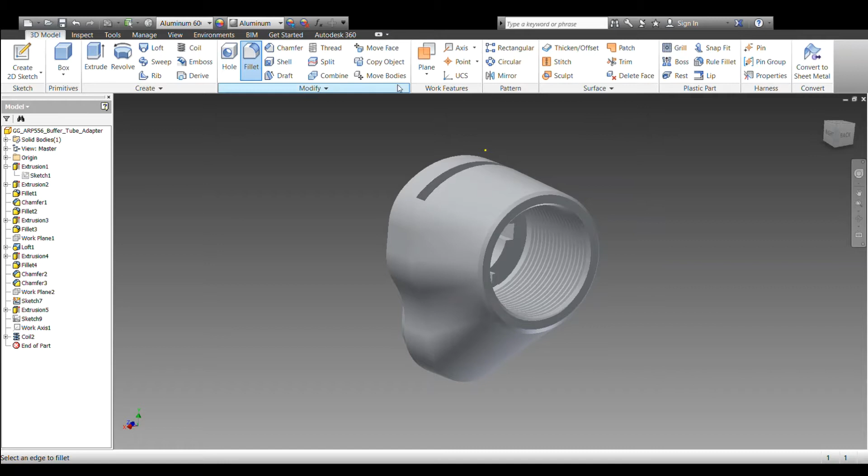I basically first started out by measuring the maximum dimensions on the X and Y, and then with a micrometer, took the measurements for the adapter plate, you know, the male part of what has to, excuse me, the female part.

Part on the ARP 556 that the adapter has to fit into. So I just took extreme dimensions to start, because that internal is really all I'm worried about there.

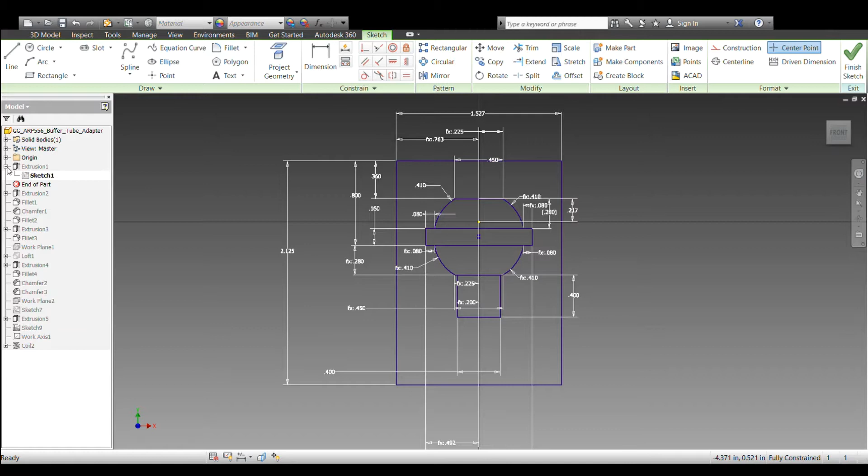So what I did here is this is just the extrusion of the male that fits into the female part. Again, just took the measurements with micrometers and added a couple fillets.

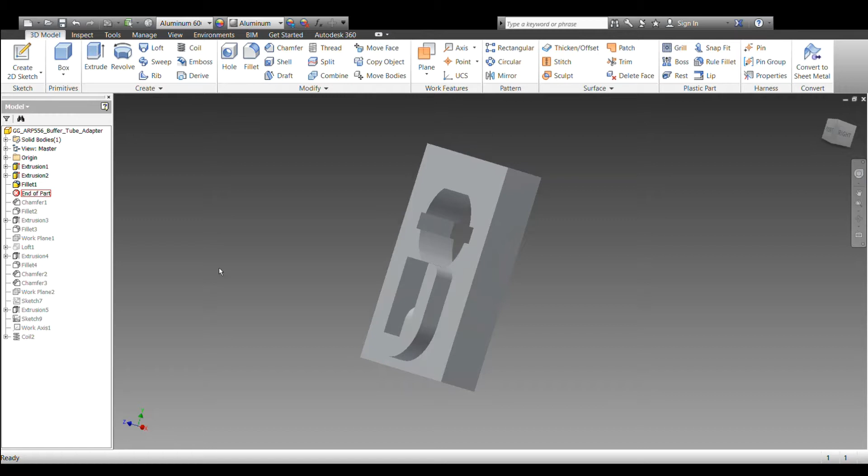There's wires that go through there, so you don't want to have any sharp edges or any kind of shear points where when you tighten everything down, it's going to get crimped in there.

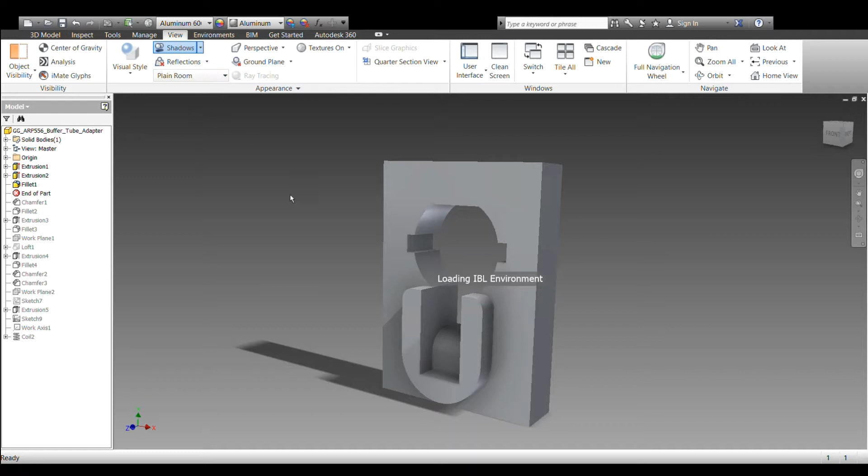So the way it is those wires are easily passed through to the buffer tube. Just a couple of chamfers again here and there, and this is all just based on the stock part that came with the gun.

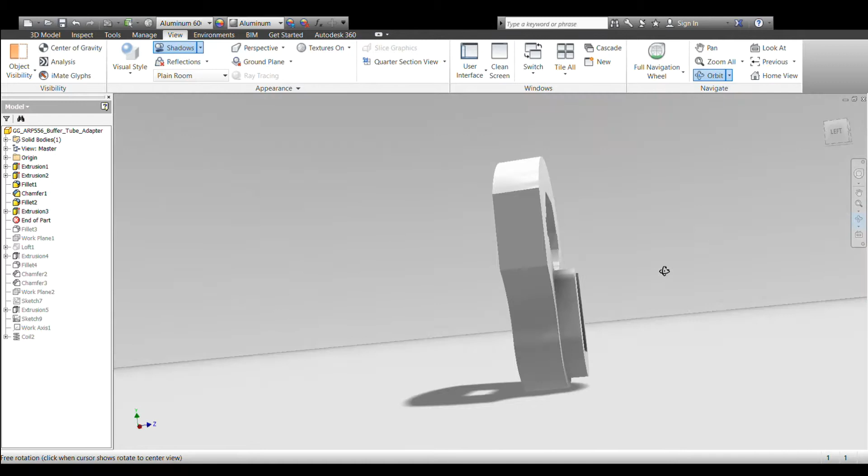I'm just kind of going through there and looking for things. They're non-critical dimensions, but I do think they serve a function in regards to molding, as well as, like we said, you don't want to have any shear points or anything that's going to crimp the wires.

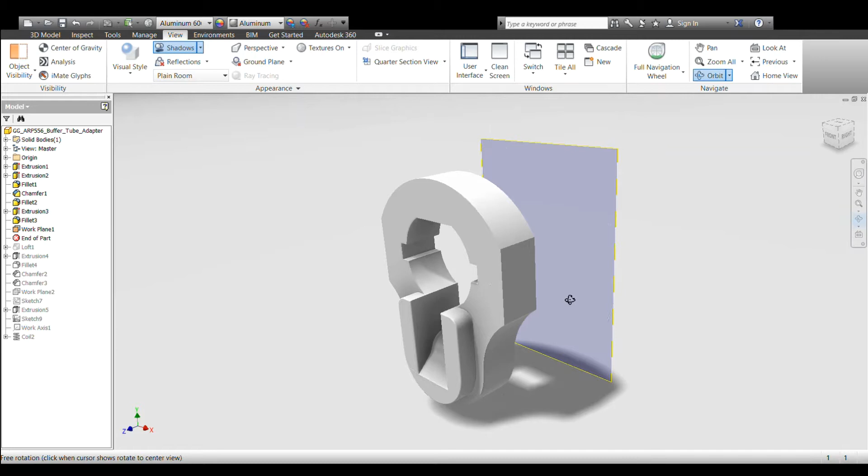So this is the loft command that I use. Basically, this is the transition step from the existing geometry to the new geometry that we want, which fortunately is just a round tube, so it's super easy. But you offset a plane, the distance that you want that tube to sit in.

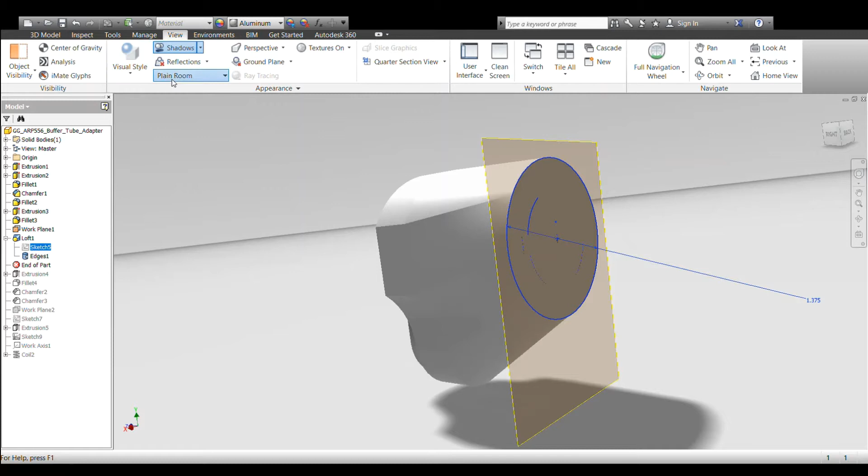Get your measurement from the tube. Now, keep in mind this is a threaded part, so you want to measure down through the diameter of the lowest point of the thread and not the top of the thread for the overall outside diameter of the tube. That's important to get your threads to match up.

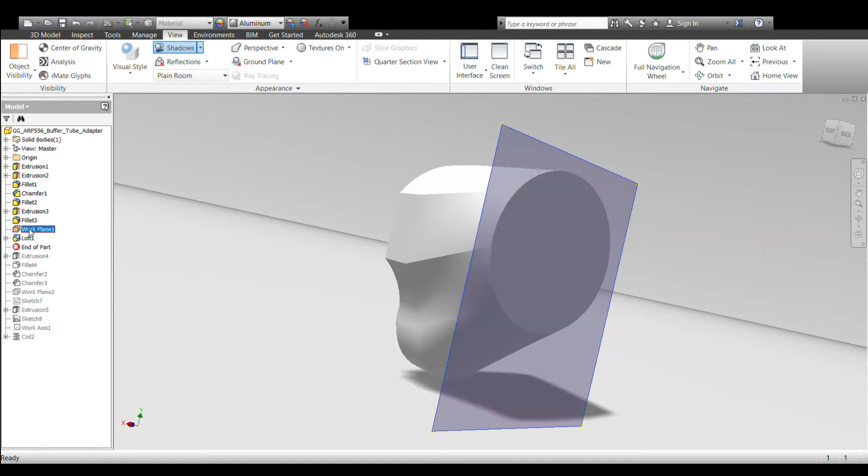Just extruded our hole through there. Now there was one trick. There's a washer that actually, you know, mounts through the back of the gun and into the spring guide.

Not a washer, a bolt with a washer. And it also adds to the strength of the adapter on the back of the gun. So that's important to be able to get that washer in there to be able to tighten it down.

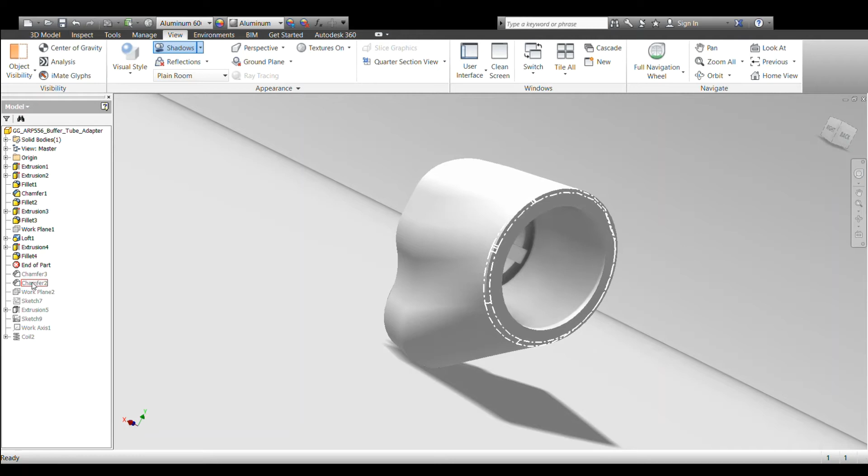So I did have to kind of take a cosmetic cheat, or something that's not desirable cosmetically for this part in order to get that in there without making it two parts. I'm working on a cap to cover it up, but for now it totally works.

It's just a slight aesthetic blemish that I'm not really happy with. You'll see it's coming up here in a second.

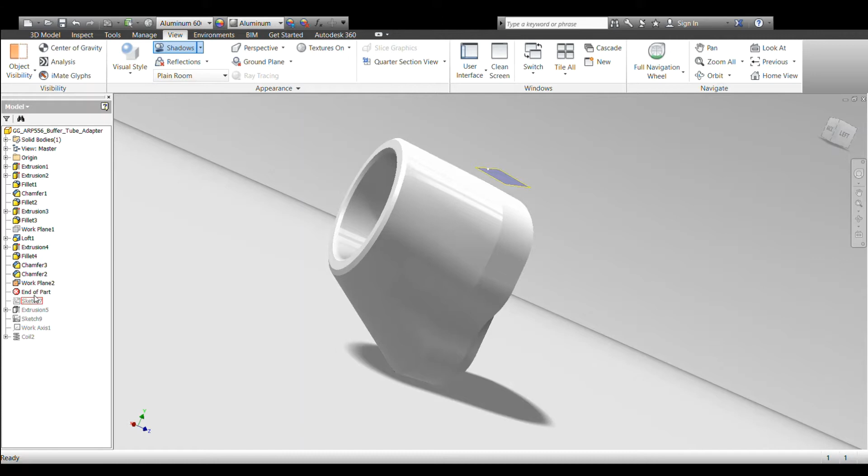It turns out I just had some sketch there. I'm not exactly sure what that was. Accidents happen, but it's just an unused sketch and an unused work plane. I'm not sure how that got in there.

All right, so that's what I'm talking about with the washer. I have to be able to drop a washer down in there and mount it. So basically I just reverse engineer the geometry, that washer is stock from the ARP, so you won't have to have another part.

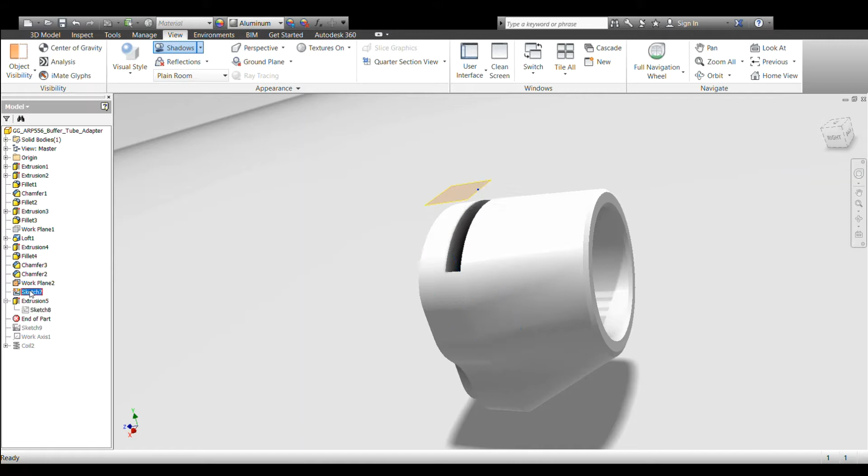You can use the stock part. Slides right in through the top there and then gets mounted through that center hole right through the spring guide. And you do have a very robust, solid connection between your gun and the adapter.

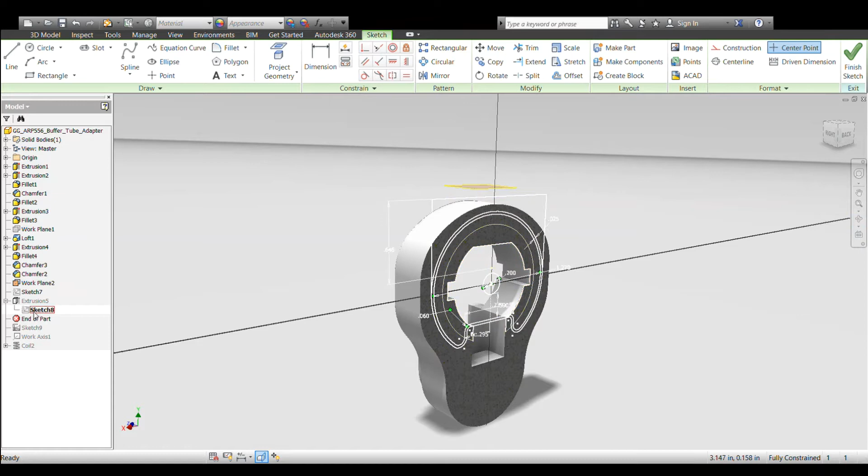So going in here, now the last step is we just have to add the threads. On this particular 3D printer that I use, it's very high detailed and you can do some pretty fine geometry. So you're able to run some threads in there.

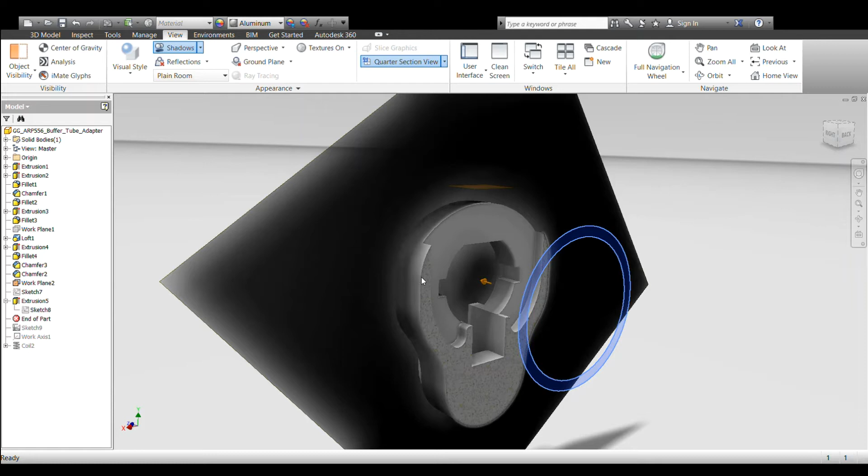Yeah, I was just showing you the profile of that washer that has to fit in there. And again, keep clearance for the wires to go through for the battery. But the threads, I wasn't exactly sure what they were on a buffer tube,

so I had to measure those threads, but we got lucky, and it turned out that they were great. Nailed it. So happy there. I didn't have to go in and change those.

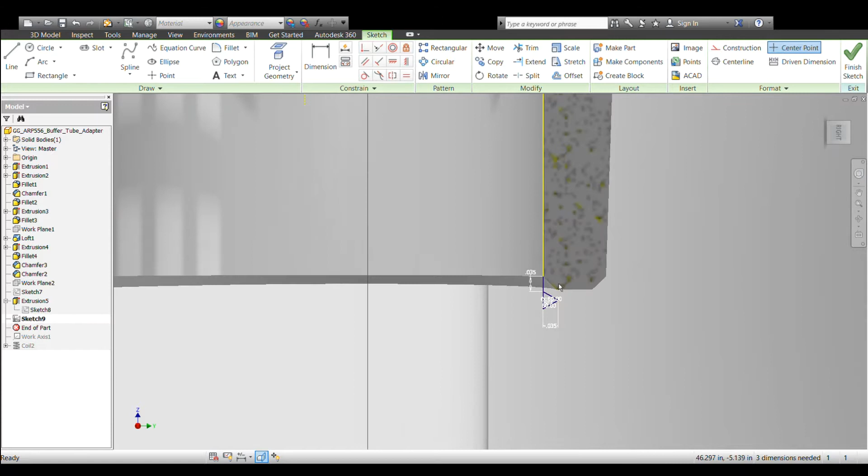But this is my thread profile again. This was all just measured right from the actual buffer tube. I've used several different makes and models of buffer tubes, and they all seem to fit. So that seems to be a standardized dimension for that thread anyway.

Now, the outer diameter of the buffer tube is different, I'm told. I do have one that fits really tight and one that actually fits pretty smoothly. And I can show you that stuff later on in the video.

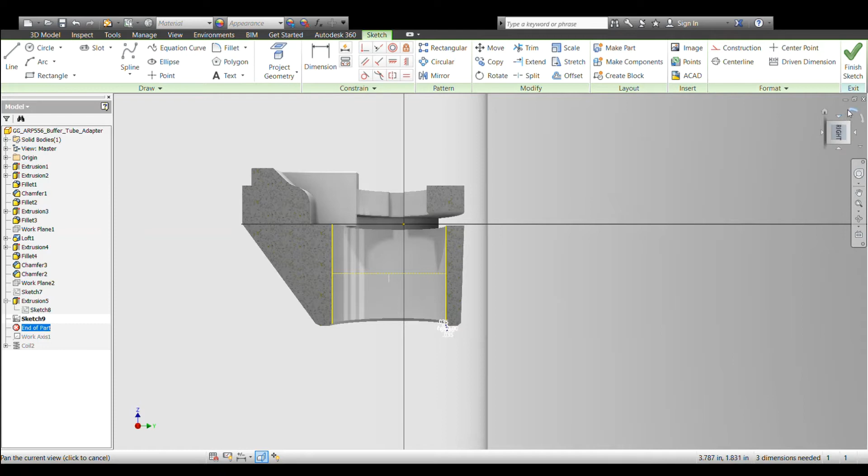But they work. These threads actually do hold it really well. And when you get your buffer tube in there with the castle nut behind it, it does hold it quite well. So anyway, here is our final step with the threads.

That's the axis that I'm going to run the coil through. And again, it's just that triangular profile that's run down through with your pitch and everything that you have to put in there.

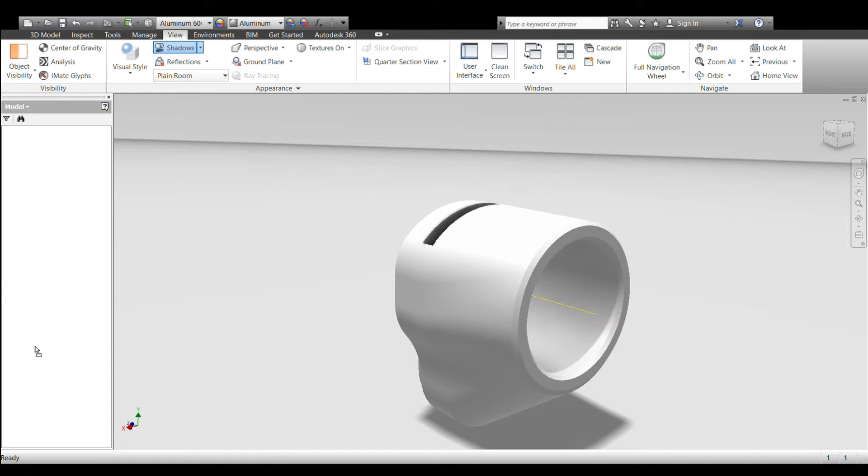And again, I just measured all that right from the part using some digital calipers, good quality ones. They don't have to be crazy, but you should be able to hold a thou on your digital calipers, and most of them do, even the cheap ones from Harbor Freight.

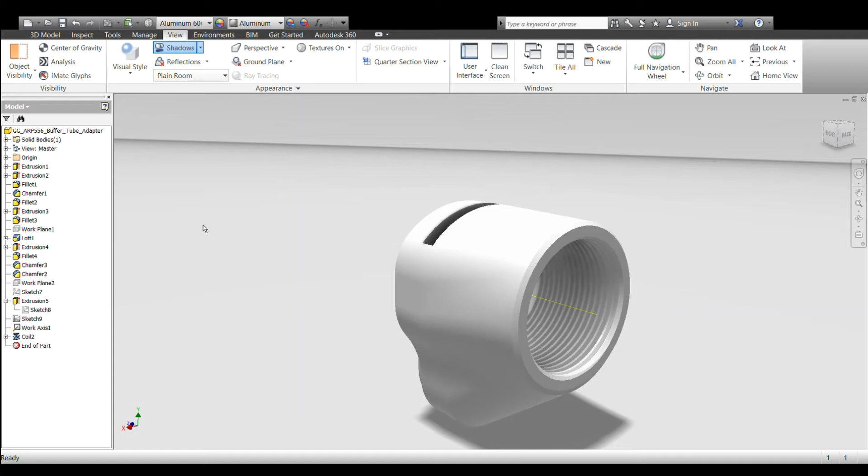So anyway, that's my part. That is what I designed and printed, and it actually works really well.

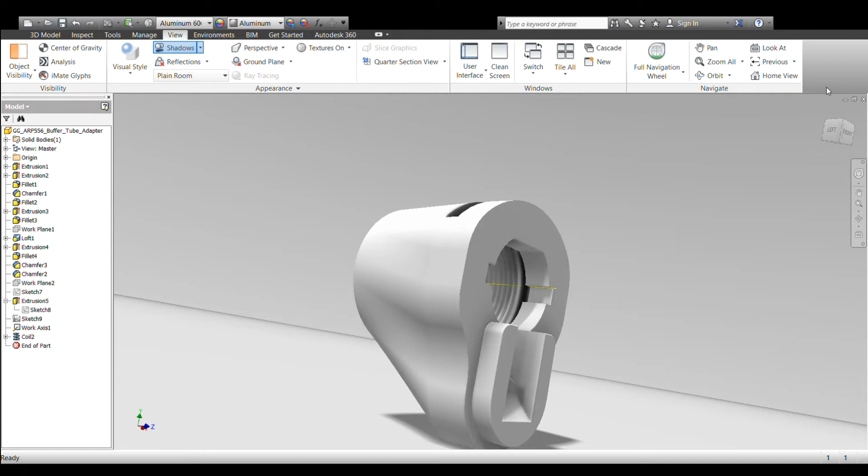So after all that, here's the buffer tube adapter that we printed. As you saw, kind of the design of it previously in the CAD run through. If you guys have any questions on how to do this, I'm happy to answer any questions in the comments.

But it's really straightforward if you can visualize it in your mind. The key here with this adapter is this geometry right here is critical for mounting to the ARP, either the 9 or the 556. So this is the stock part, and this is the part that I designed. Obviously this stuff here has to be consistent. These rails are irrelevant because they're not going to be there anymore on the buffer tube. So this is the profile that matters, and then this geometry here is where the wires go through, so that has to be clear with no shear points.

Basically we just knocked that design off and added from here back. Again, this is all irrelevant. And now we have our buffer tube to screw in there with the castle nut. I've done this on 2 guns. This is what it looks like stock on the ARP 9. The ARP 9 and the ARP 556 are identical from this back here, as well as this stock.

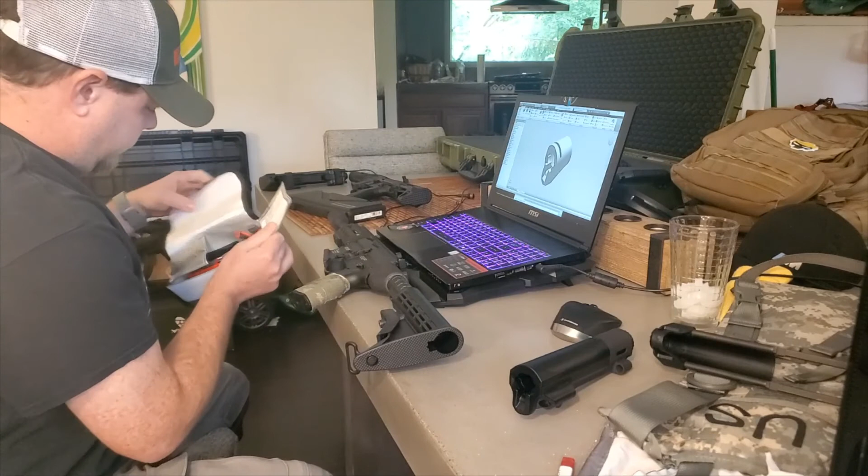This was a battery that came with the ARP 556. It's an 11.1 LiPo. This thing will fit in there fine. Again, I'd like to tuck these wires in a little better, and then when everything comes out, it gets plugged in there. So you could just put some kind of plug to hold it in there while you're playing. It's not going to fall out, but I personally don't like the aesthetic of that. It kind of looks chintzy and half-assed. So anyway, that's an issue that's solvable with just this piece here.

So this is an ARP 556, again, with the buffer tube adapter. We've also done some other things, like this is a 3D printed amplifier. Does make actually significant noise, and I'm working on making them louder, for those of you that like an airsoft gun that's loud, but right now this is my only thing. And again, this stock's going to get changed, and I'll show you what we're going to change it to.

So again, same gun. The whole build on these are consistent. They have identical internals, hop-up units. They both have Max Pros in them. I really like these. I hear people talk shit about them. They say they're super expensive, but I like them, and I haven't found anything that I think shoots better. So for me, it's worth it. It does look badass in there.